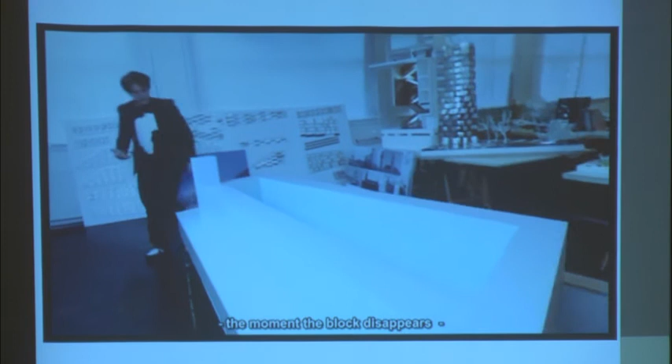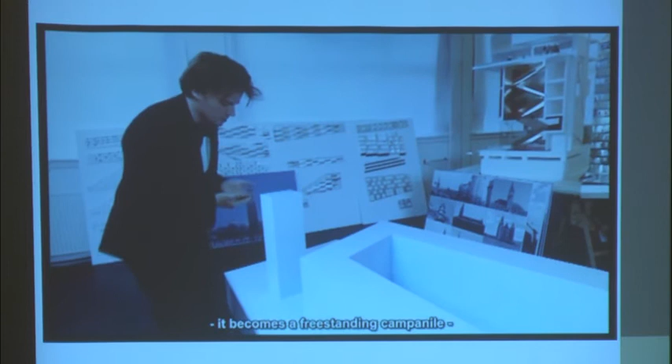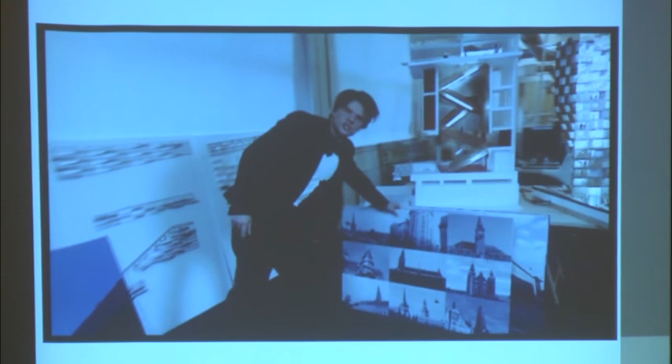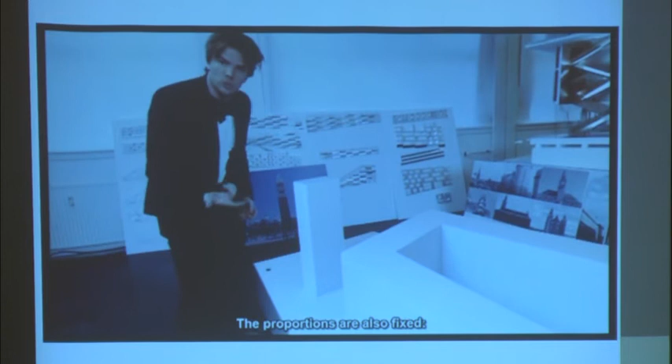Altså sådan en monolit omgivet af byrum på alle sider. Og eftersom det skal være sådan et københavnsk tårn, som man kender det fra de traditionelle tårne og spir vi har i København, så skal det ikke være sådan en stor skyskraber, men det skal være sådan et højt, slankt tårn. Det skal være så slankt, at det faktisk har et fodaftryk på kun 160 kvadratmeter, som svarer til et almindeligt parcelhus, men vel at mærke et parcelhus i 16 etager. Proportionerne er også lagt fast, det skal være 10 gange 16 meter, henvendt mod syd.

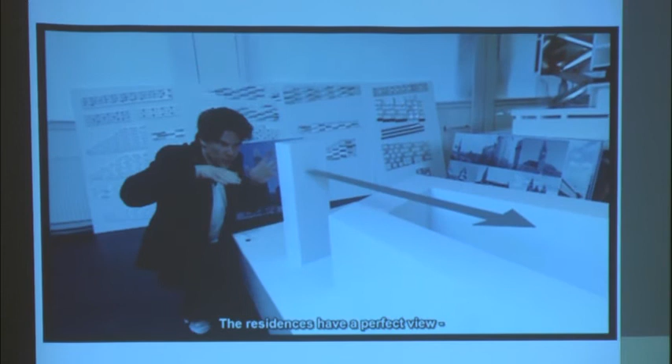Man kan sige, i den øverste del af tårnet, der fungerer det fint, så ligger boligen og kigger ud over den formidable udsigt hen over taglandskabet på vores egen karré. Men i den nederste del, der ligger de og kigger lige ind i ryggen på vores egen bygning. Så der foreslår vi simpelthen at dreje hele underdelen, sådan så boligerne kigger mod sydvest ud mod pladsen.

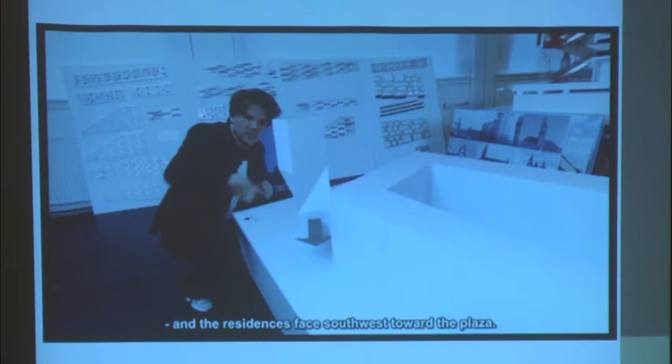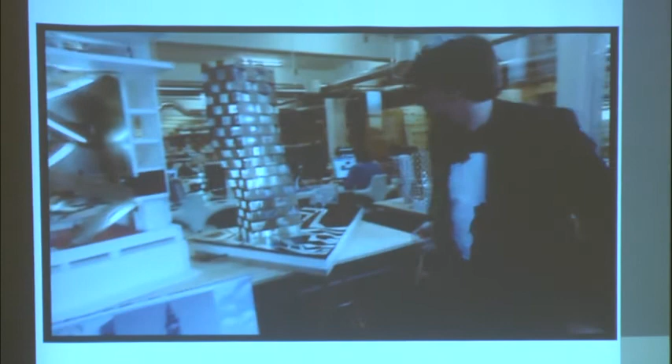Resultatet er sådan en form for vredent tårn, som har lidt samme formsprog, som man kender det fra en mælkekarton, lige inden den er ved at brase sammen, når man skal smide den ud. Og resultatet, rent arkitektonisk, bliver de facetterede, trekantede gavlmotiver. Og faktisk her for enden kan man se det, der kunne minde om sådan en traditionel købmandsgård, altså sådan en spids gavl med sadeltag, som er ligesom en del af det her ellers moderne tårn.

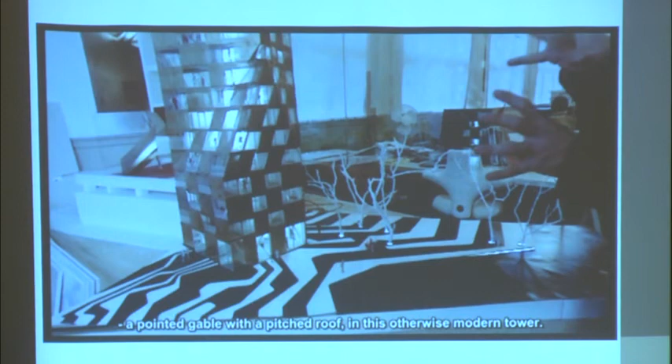Det var så det lille tårn. Nu mangler vi kun de sidste 57.000 kvadratmeter over i den kæmpe store karré. Men det er jo et stort hus. Et meget stort hus.

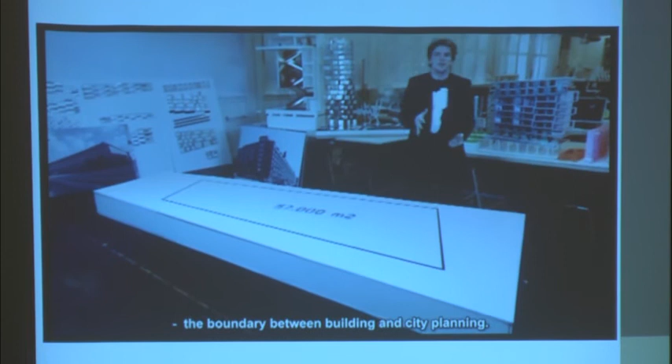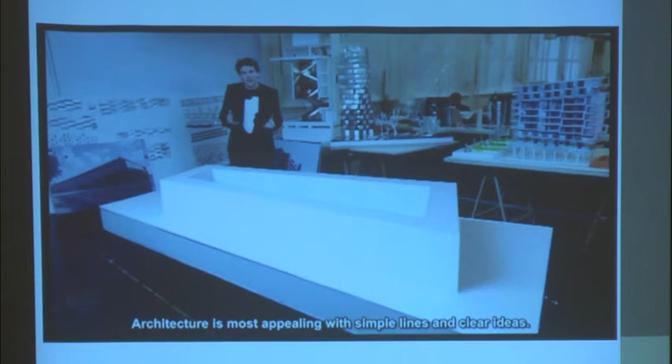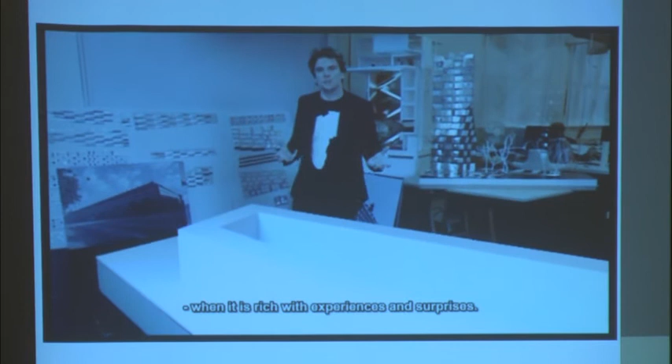Faktisk er det så stort, at det står og vipper på kanten mellem at være en bygning og være byplanlægning. Altså et helt kvarter, som er opført på én gang som et hus. Og hvor arkitektur fremstår smukkest med enkle linjer og klare tanker, så fremstår en by mest levende med oplevelsesrigdom og overraskelser. Så det er på en eller anden måde sådan en paradoksal udfordring på en gang at skabe enkelhed og variation, at skabe forskellighed og sammenhæng. Altså på en måde at skabe en by i bygningen.

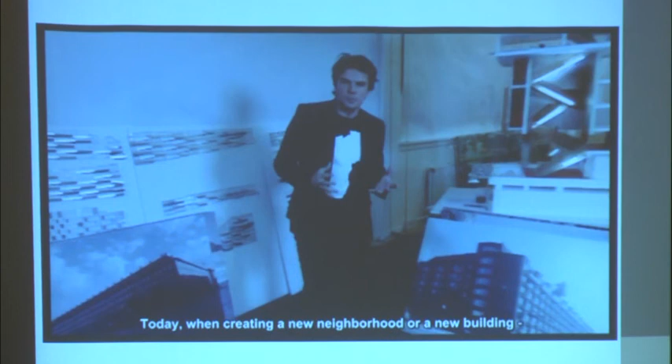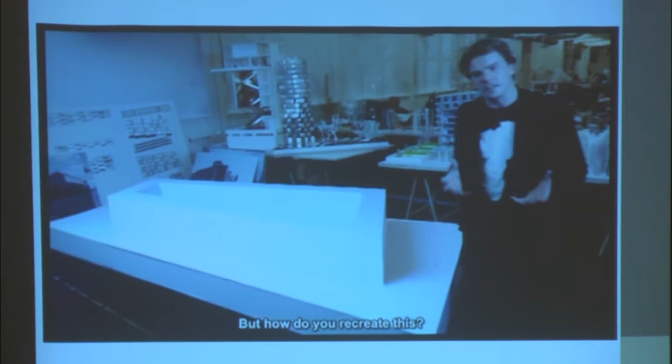Og der er man i dag blevet meget mere opmærksom på, når man skaber et nyt kvarter eller en ny bygning, at prøve at genskabe noget af den variation, man finder i den historiske by. Men hvordan genskaber man så den? Jo, man kan for eksempel prøve at lave noget, som ligner den historiske by.

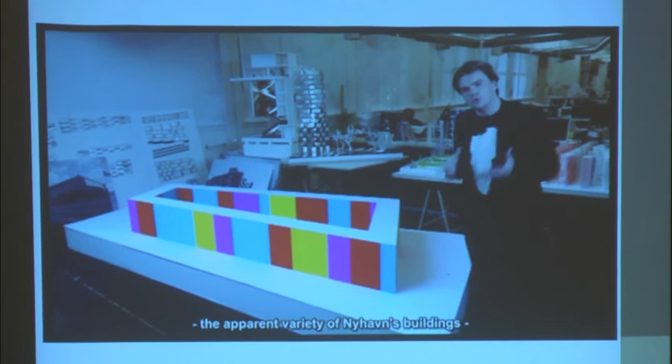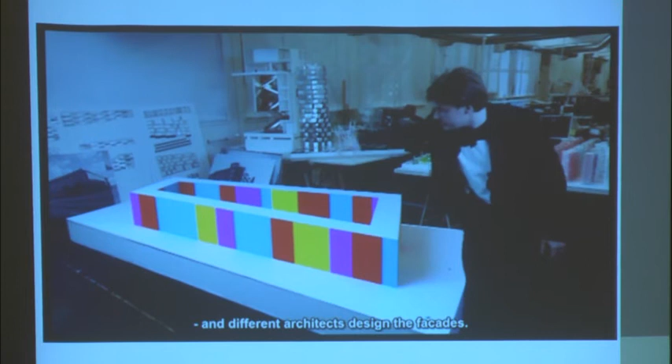Og derfor har man nogle steder forsøgt at skabe, skal vi sige, Nyhavns tilsyneladende variation af forskellige bygninger, ved at få den samme arkitekt til at tegne alle boligerne, og så få nogle forskellige arkitekter til at tegne facaderne. Altså på en eller anden måde en form for kosmetisk variation, som ligger som sådan et 40 cm tykt lag uden på en ellers fuldstændig ensartet boligmasse.

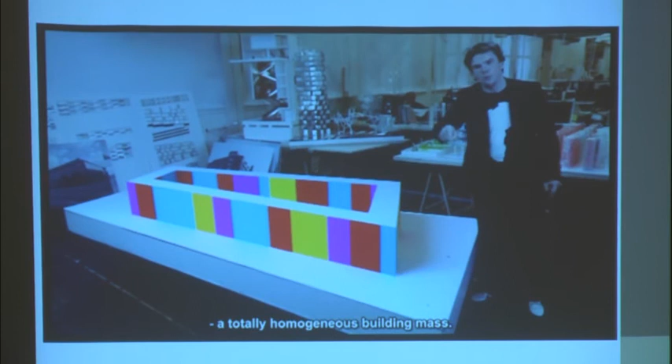Man kender det lidt fra en westernby, hvor man har taget en masse forskellige facader og smækket dem op på nogle ens bagvedliggende barakker.

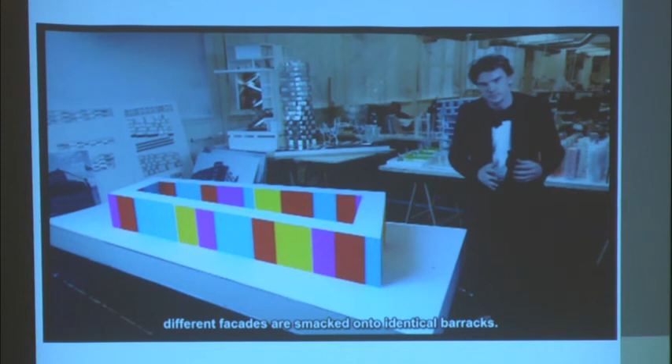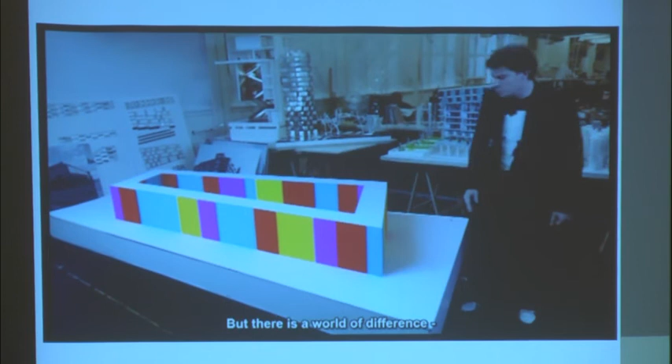Men vi er egentlig ikke specielt interesseret i den her form for falske forskellighed. Og måske er der ikke den store forskel på, om man bygger 30 meter til højre eller venstre. Men hvis du bygger 30 meter oppe eller nede, er der en verden til forskel. Især hvis du spørger ejendomsmægleren.

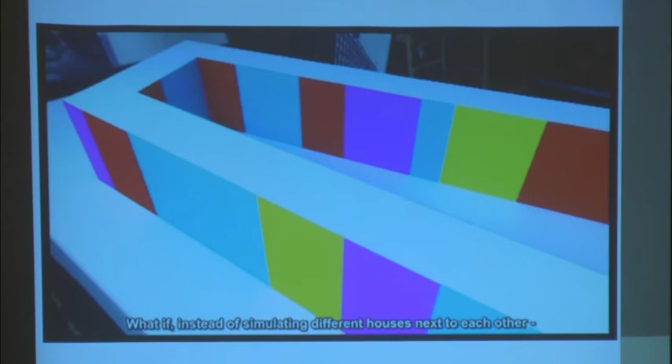Men hvad hvis vi i stedet for at simulere forskellige huse ved siden af hinanden, lægger forskellige funktioner oven på hinanden, som en form for urban lagkage, hvor den enkelte aktivitet ligger aflejret oven på den næste.

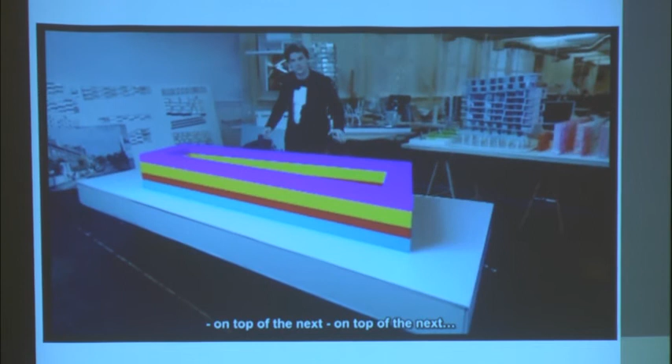For eksempel så butikker og kontorer, de kan godt lide at have direkte kontakt til kunderne i gadeplan. De kan godt lide at have store sammenhængende etager. Og endelig så har de brug for dagslys, men de hader direkte solskin i øjnene eller på computerskærmen. Så derfor foreslår vi at lægge hele erhvervsdelen nederst i bygningen.

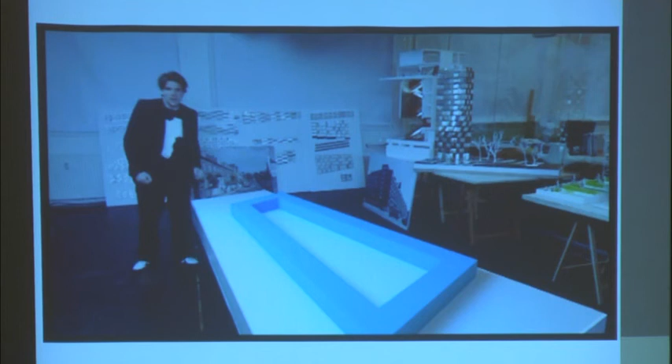Omvendt så kan boliger, de elsker solskin. Til gengæld så hader de at ligge i stueetagen, hvor folk kan glo lige ind i deres lejlighed. Så derfor foreslår vi at lægge alle boligerne oven på erhvervsdelen.

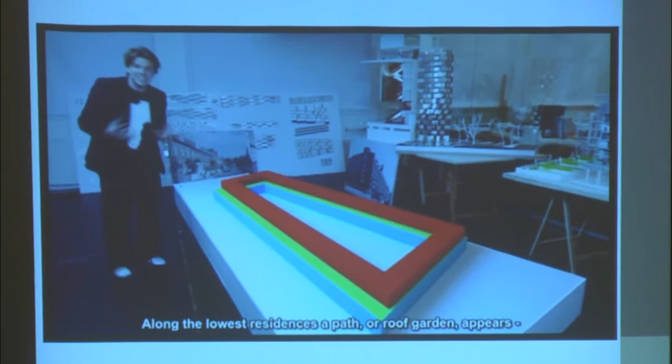Men nu er det sådan, at butikker og kontorer, de har dybere etager end for eksempel boliger. Så hele vejen langs de nederste boliger opstår der sådan en form for sti eller taghave. Lidt ligesom man kender det fra kartoffelrækkerne ved søerne i København.

Our dean has asked me to explain what's going on, just so we can follow. What he's talking about is recreating this neighborhood in a building.

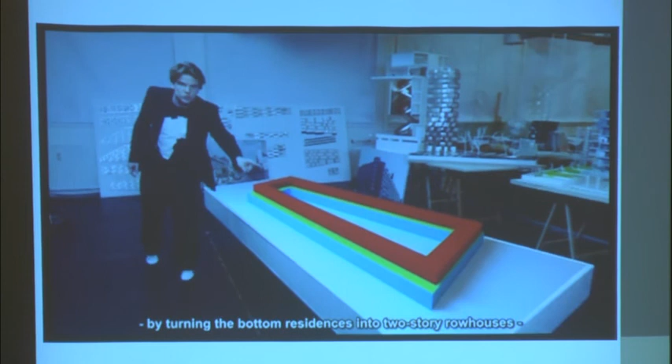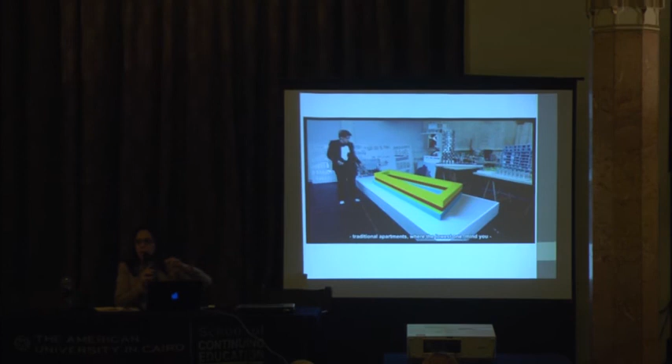The typical Danish neighborhood is houses beside one another, with shops and commercial spaces on the ground floor and residences on top. What he is proposing in his block is thinking of this as layers and giving each group or user type its optimum position. So bringing all the commercial and office spaces to the ground, creating duplexes of homes on top, apartment blocks above, and penthouses on the rooftop.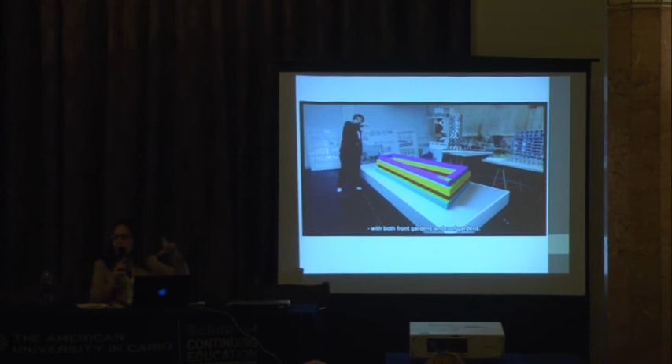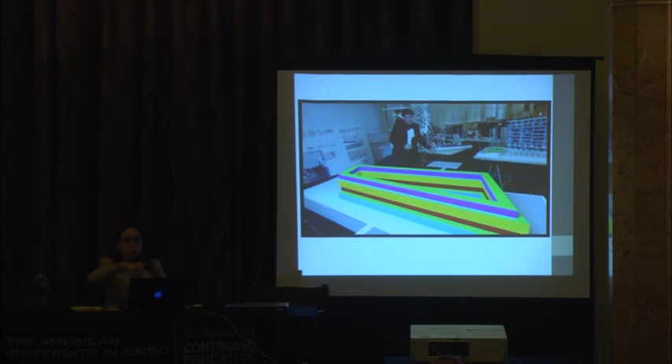He'll get to that. So the city asks that there are two plazas in the city that need to have direct access to one another, and they don't want this new neighborhood to block that access.

But at the same time, he has this huge plot that he wants to work with and not sacrifice any square meterage of space. So that's why he does this tapering in the middle to make the minimum footprint but still be able to have the maximum area.

He's actually increased the area because the inclined line is now longer than the straight line. Those diagonals are actually longer, so he's got more space than he had before, and he's given the city the space they wanted to connect the two plazas to one another.

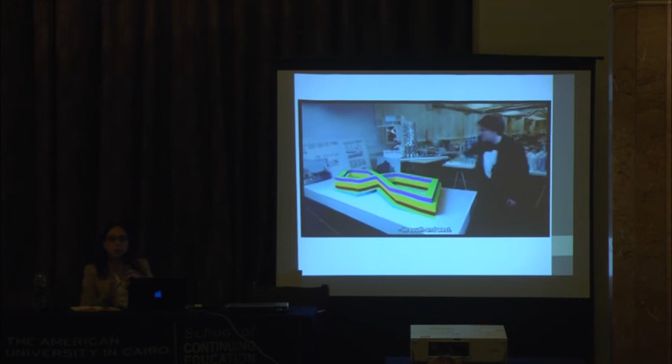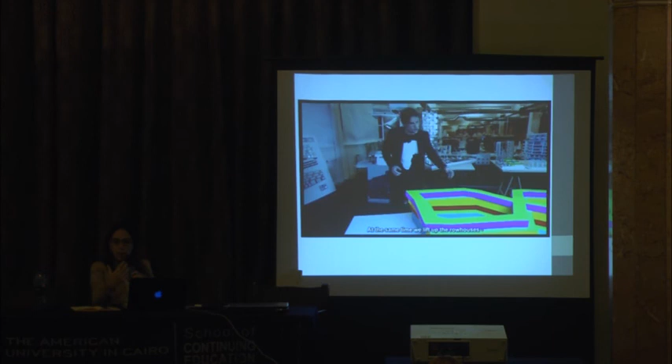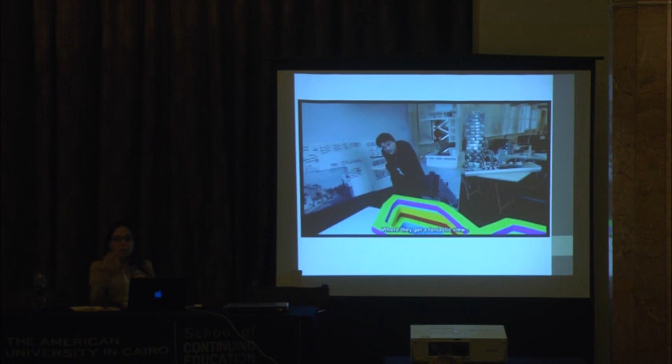Now he's going to talk about how he optimizes and molds the building around the movement of the sun. In the north, the way they deal with daylight is very different than in the south. In the south, you're trying to run away from direct sunlight, protecting your buildings from the heat. In Denmark, you're trying to open up your building to the sunlight because they don't get it very long, and it's very cold, and sunlight does represent a thermal gain to them.

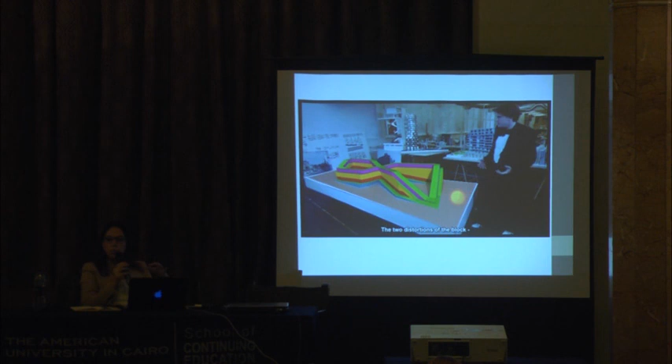So here he's showing how he models the movement of the sun to optimize allowing as much sun as possible into the buildings, into those dark corners of the courtyard, by molding the building down. Those angles, he does it just with his hand now, but they're very carefully calculated with regards to the angles of the sun at different times of day, winter versus summer, and so on. They do a lot of simulation to show how the sun moves into the different parts of the building throughout the day.

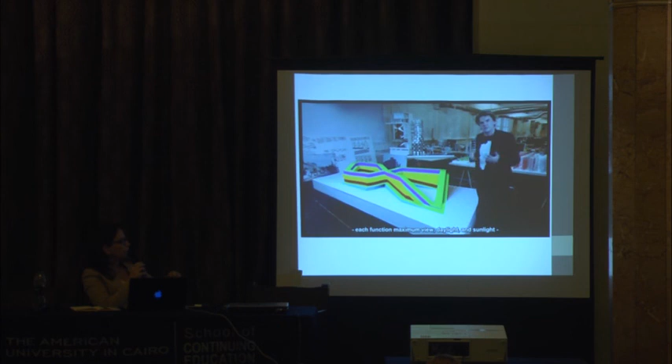And with that fold, he also allows a view for the people that are stuck in the corner of the building, who would otherwise only have a view of their neighbors across the courtyard.

And also with this ramp, or this tuck down of the form, he's brought the building down to the ground to allow pedestrian and cycle access all the way to the top.

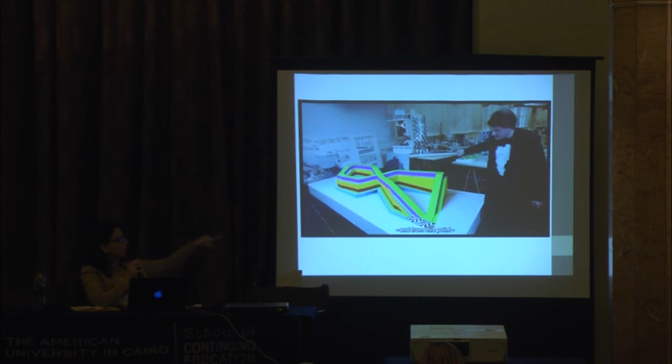There's a really nice part of the video that'll start in a moment that shows you the journey of a person entering the building. This little red man jogging along will take you on a little tour of how someone would be jogging to their home on the way back from work and move through the building. It's all yours.

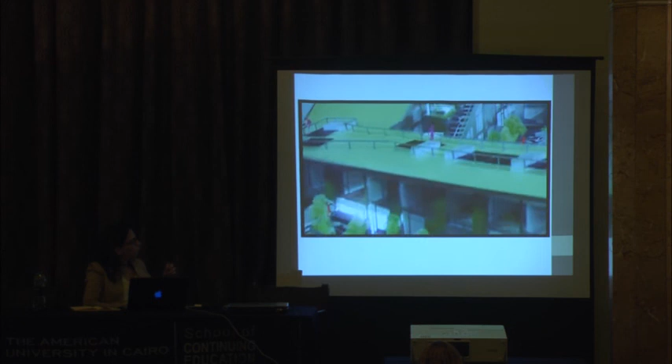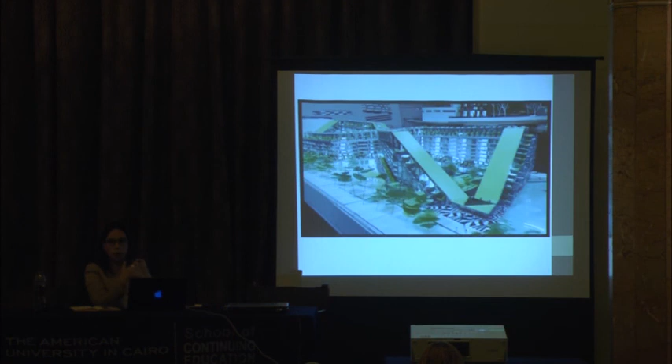It's kind of similar to this village-like quality we were talking about before, that in villages everything's walkable. In informal settlements everything's walkable, and that's one of the big values of these communities. One of the big drawbacks of these vertical, dense, large-scale 500-unit communities he's building is that nothing is walkable. You get on an elevator, it's like that Japanese experience, a mechanical experience going up and down elevators in a tower. So through this design, and in making it walkable, he's also made it very human and very social.

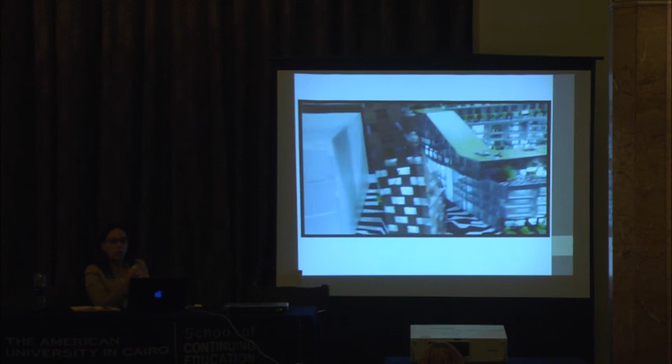Because in the walkability of things, there are places where people can meet, where children can play.